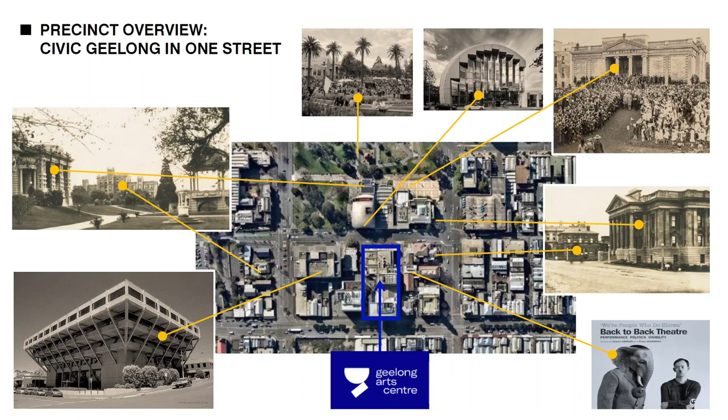Geelong Arts Centre, located in the civic hub. It's a fairly significant precinct, got all the civic buildings in it, so it's a very important building in terms of Geelong's growth, particularly now as Geelong and that whole area is really one of the fastest growing places in Australia.

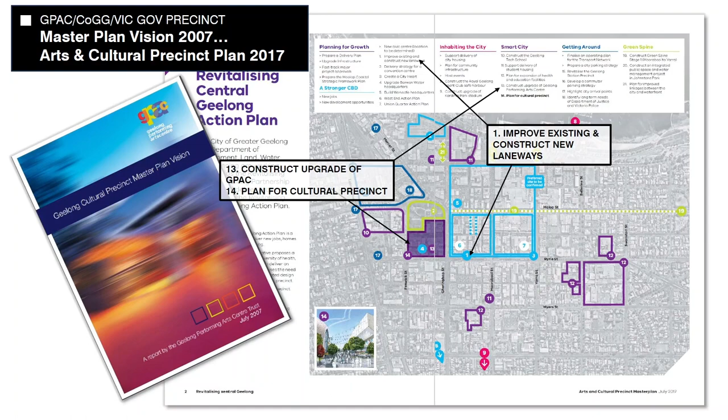The whole project is really a combination of a vision from the 2007 master plan that the GPAC did, and also both the state government and City of Geelong's idea about creating this area as a precinct. The initiatives included upgrading GPAC, a 40-year-old building with over 40 odd levels through it, a building that unfortunately had outlived its usefulness, even though it's been much loved. There's also the ongoing thing with Geelong about upgrading the streets, the laneways, and the pedestrianisation.

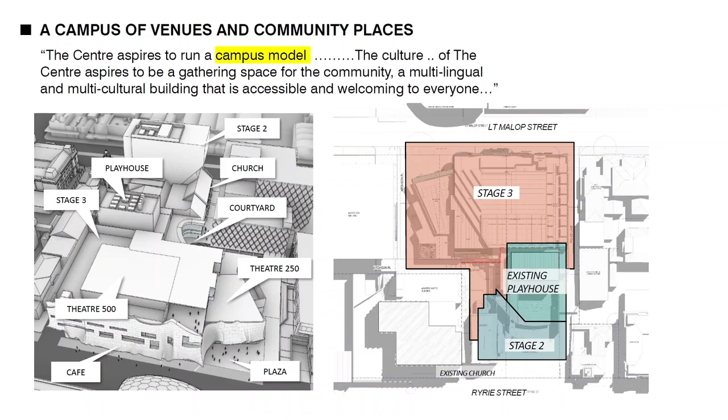Hassell did master plan, one of the many master plans we've done, and then we got to do stage 3. The project itself was to add 2 new theatres, a 500-seat theatre and a 250 performance space. Both were to be highly flexible, and the ambition from the Arts Centre was to make them into the next generation theatre spaces, which I'll cover briefly.

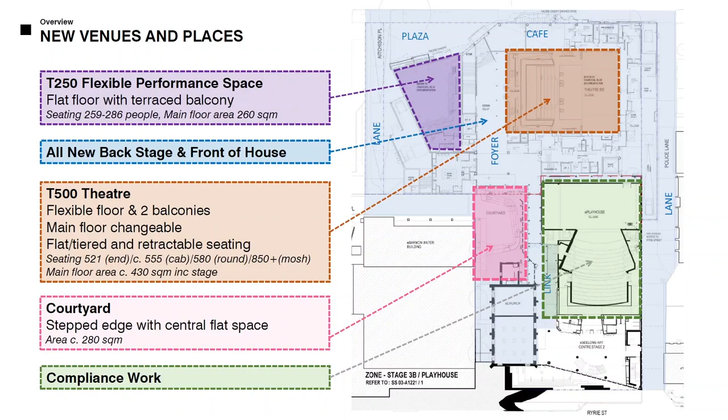We had to do some compliance works, given that the actual performance area in the old playhouse had a whole lot of issues to comply. Later on, through advocacy, there was the upgrade of the streets. When we originally got the project, they were just to be service lanes. The streets actually was located where that foyer was, where the old Atchison Place was, and we had to relocate that to adjacent to the upside down building.

But a key driver in the whole scheme was the fact that the actual location is a very significant Wadawurrung area. It's a wetlands, which is why it's a park, left as a park, fills up with water every now and again. So it's a very significant gathering place and ceremonial space in the Wadawurrung's history.

It's also a very significant place in settled history because of the church hall and the old Masonic Hall, an 1880s hall, which burnt down and then was replaced with another hall. There's been a place of recitals and orations with Indigenous history, 40, 50,000 years, and settled history really since the mid-19th century.

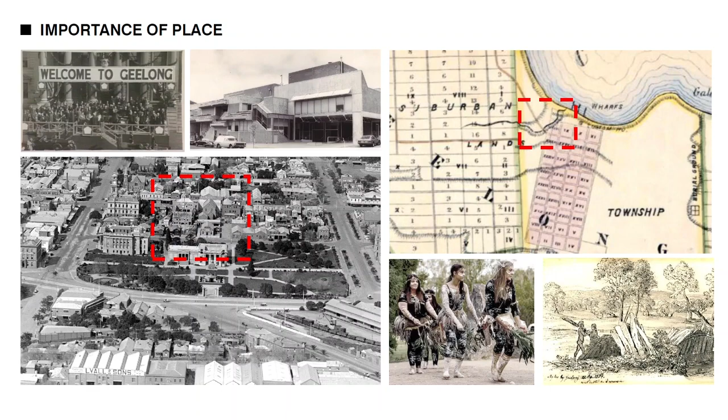So it's a very significant driver of the design, this idea about celebrating theatre, performance, music, all that sort of thing.

While we were still doing what we'd refer to as the block and stack, which is really just working out how the brief fits into the design, we had started discussions with the Wadawurrung and mention of Corrina Eccles, who has been fantastic. The discussions were that we would ask them if they would participate in the theming of the building, of actually driving the proposition about what the building is.

So they came up with these ideas about the levels. At the ground level, they would consider it like ochre country and the shore. The middle level, they would consider as the Moonah Forest. Then there's the upper level, sky country, and then the night sky. And they're represented by the images, these are the images they provided for us.

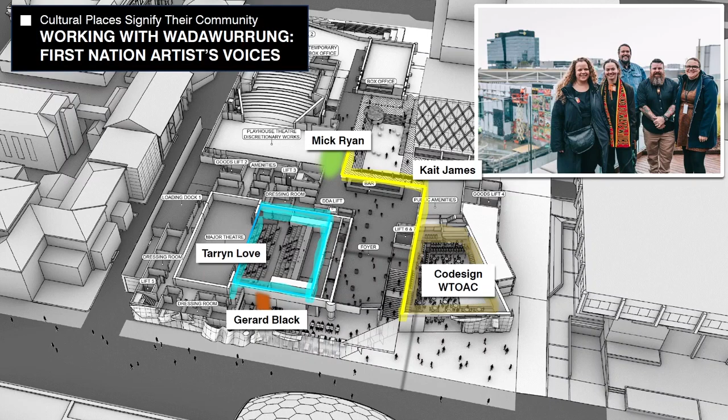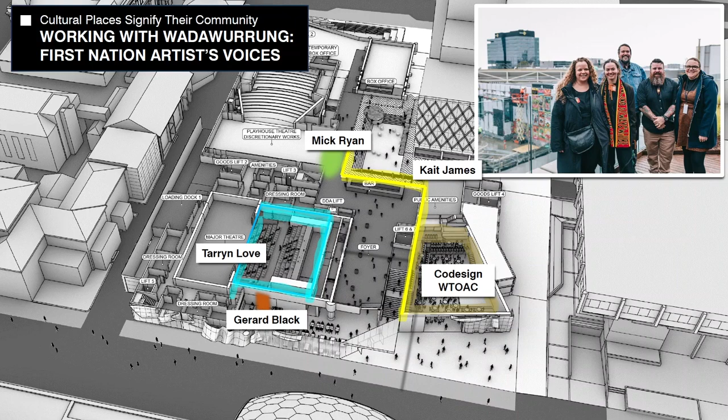It took quite a while to get the discussion going, but they were really fantastic at articulating the narrative that they wanted to see in the building. As the program progressed, we also worked with them to commission a series of artists to work with us on the project. So in some instances, we worked with Wadawurrung to do design theming and design outcomes, and then we also worked with artists Gerard Black, Tarryn Love, Mick Ryan and Kait James to actually work on the fabric of the building.

This really is a summary of that work. Kait James' work on the far right is just incredible, it's the exterior cladding. Her thematics are beautiful tea towels of kitsch Australiana, but it's got 'treaty' written on it. We had to get rid of all the swear words off it—the government didn't allow us to put the swear words on.

Amazing, isn't it? Then Tarryn Love worked on a series of ancestral lines of patterning, which are then embedded into the theatre. That's the blue one in the middle at the bottom.

Gerard Black's area—he's a tattoo artist. He made this sort of motif and illuminated artwork that's in the cafe.

And then we worked with the Wadawurrung to do the Moonah Forest carpet, Bunjil's feathers, and the Moonah Forest panelling. That took quite a while, and they worked right through. In fact, Tarryn and Kait came into the office and worked with the 3D guys on the computer, because I've never worked on anything quite so big before.

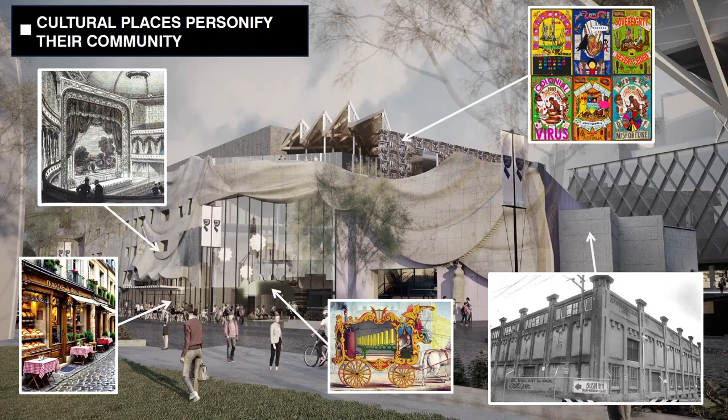The other theme, the other driver, is the history of performance that all Australians have experienced—whether it's the theatre, the mosh pit, the boxing tent, or the circus. All of those things become aspects of the design that we wanted to encapsulate. This is just one example, with the street presence, where Kate James's work is lining that upper level.

There's a history of industrialisation in Geelong. There's the organ that's dragged along by the circus. There's the French cafe and the giant curtain or tent.

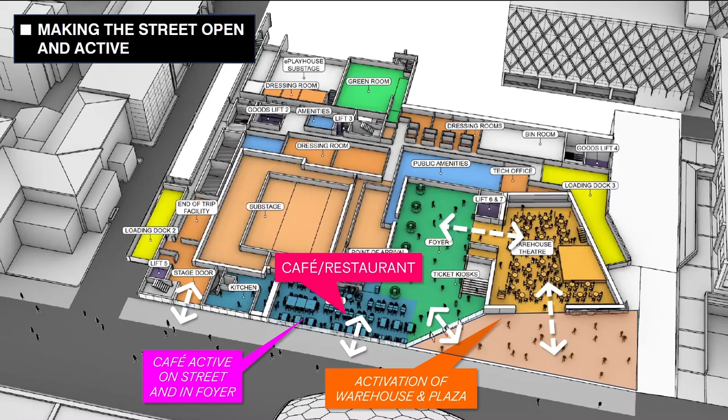So the whole front of the building has been designed so that it activates the street. The foyer is actually a cafe, so when you walk in, you're walking through beside the area, which is the cafe.

That's a steal from a London theatre that's really successful, so you don't end up with this sort of dead foyer when there's nothing on. The cafe is actually the foyer.

The warehouse theatre actually opens up—we'll talk a bit more about that. And the stage door is also kind of masking what is a loading dock area, so it actually helps us make that on-street presence more active.

I'll quickly go through the spaces. You come into the cafe, then there's the main foyer, which is the sort of lounge room—maybe it's the bar. There's also a gallery.

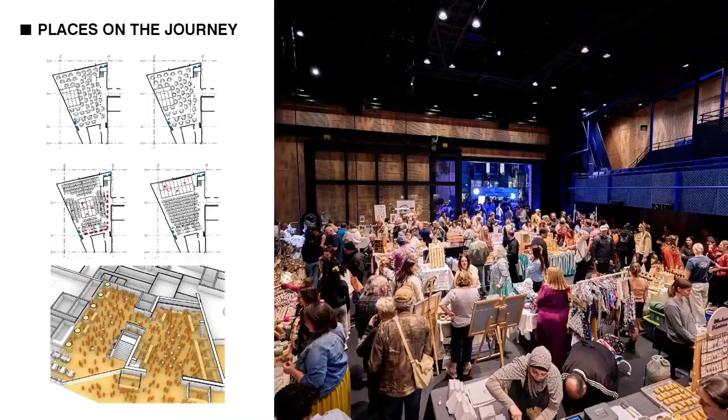The 250 Theatre is an unusual theatre, which, as you can see, has a big door that opens up out to the street. They use it for markets, for garage bands, all sorts of things.

There are lots of studies on how that would be laid out. It's got a fantastic tech zone above it, used also as an exhibition gallery. There's a line that links.

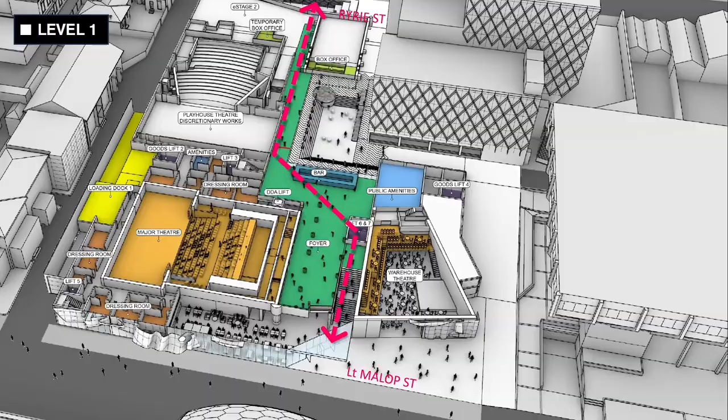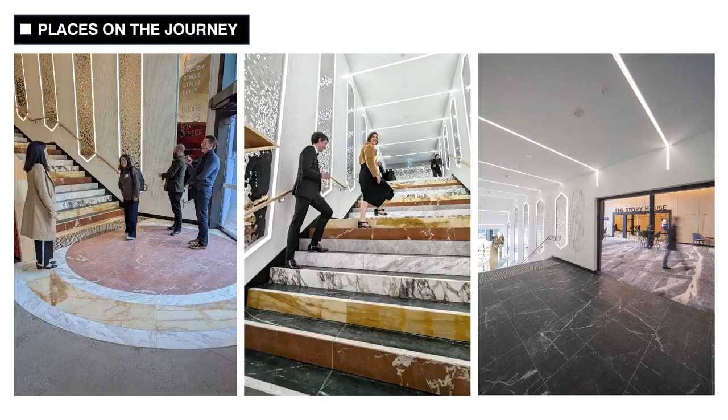Part of the thing was to make sure we could maintain the hassle end—the area where all the artists make things—into the area where they perform, and the audience can walk right through it, street to street. So the interior spaces all mark themselves as individual spaces: the funfair stair, the main foyer, the tent.

The miracle of LL Joiners, who made the incredible curved timber tent. All of the spaces are rigged so they can actually be used, and they're full of comms and data, so they can actually be used as performance spaces as well.

That's very unusual, most unusual for a theatre that we've been involved in, because there is quite a bit of technology in the foyers, so they can be used for performance.

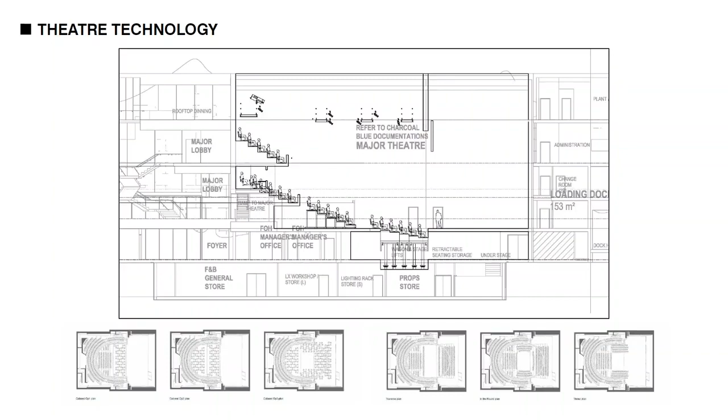The 500-seat theatre is really flexible—you can have 800 people in there, a mosh pit, backstage, all-gender toilets. That was very controversial, so that the actual space where you wash your hands is a public space. The link through to Hassel, and then the streets around it.

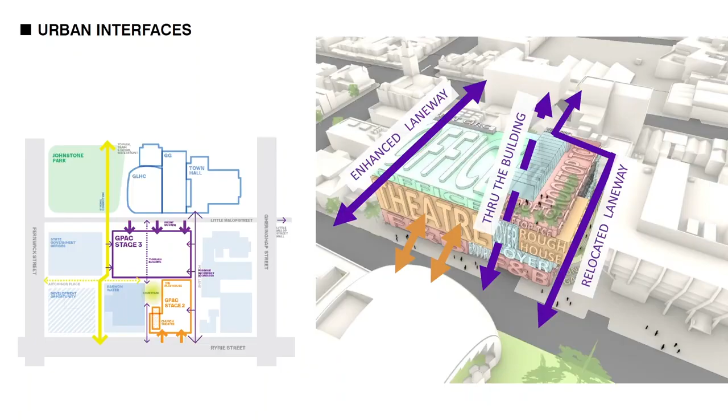The plaza, streets, courtyard.

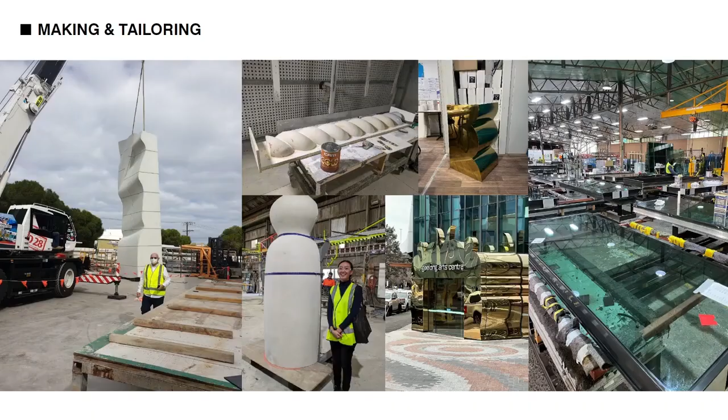We also made lots of stuff—a lot of it was made in Geelong. The glass, all the carpets, were all made in Geelong. We had to teach Godfrey Hirst how to do specialist carpets.

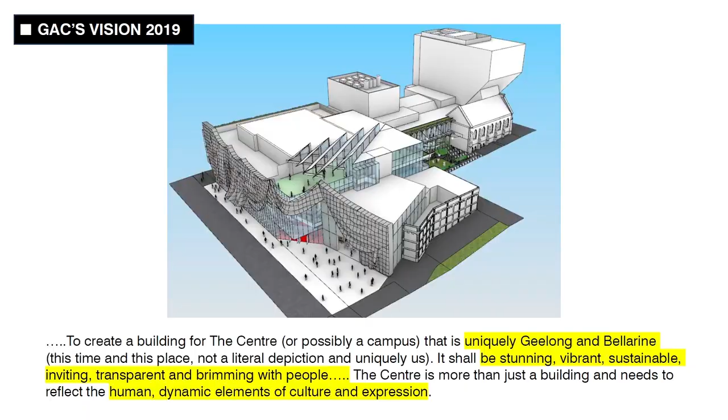Going backwards, right? Can't do that. Thank you, excellent, thanks.